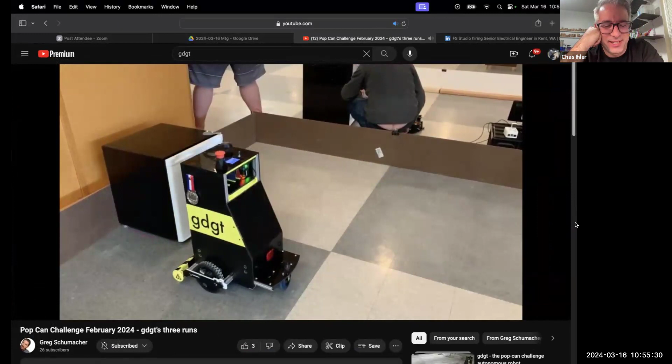What did you do your presentation information in for your robot? Did you just make PowerPoint slides or? Yeah, exactly. Is your phone case yellow on purpose? No, just by chance. He's got his second place award case from last year, like my son's phone case, right there on his robot. He doesn't use it anymore. Hey, that's on brand.

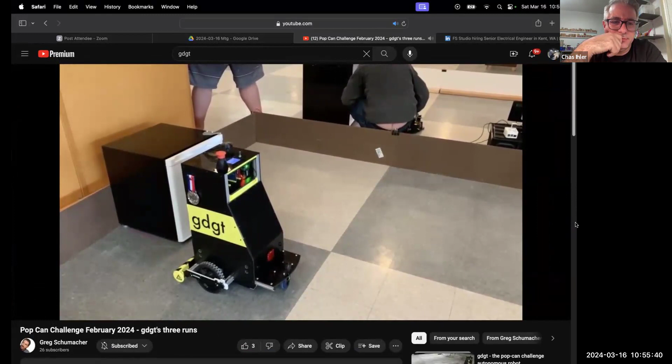It's got a little kind of edge on the side to grab that side. It's a little piece of acrylic. Who's this guy? You can kind of see he's turning on the light right now so that he can do his image detection with the light on and light off.

So it's kind of slipping slowly. I wonder if Greg's considered suction cups. And then you have to have some ability to release the suction or pull it in. Oh so yeah, you can't let go of air once you grab it, with a Venturi valve or something, you know.

It's really funny that you mentioned that, because the first thing I thought of was having a little shelf at the bottom of the claw that would keep the can from slipping down. And then I thought, well, wait a minute, when you go to set it down on the table, as the robot backs away, the can would be on the shelf, not on the table, and it would just pull the can back off.

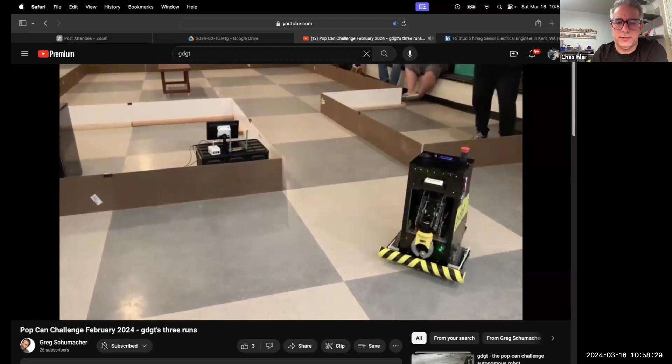Yeah, I don't think anybody's ever used a dolly as a frame. You only got 35 pounds, so you can't get too crazy with weight. That's the other cool thing about the waffle bot, I'm assuming it doesn't weigh very much. Oh yeah, well, I think that's mostly a 3D printed construction, if I remember right.

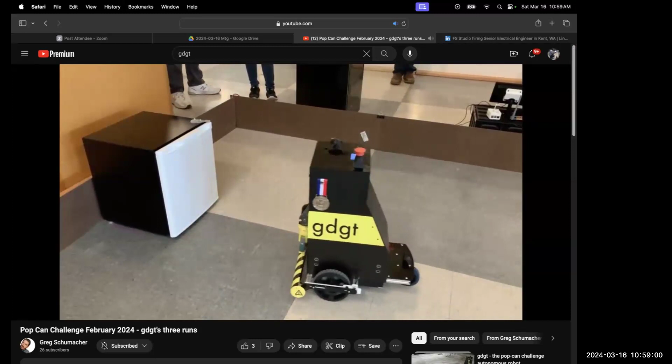He actually has to, how do I say this, like Gidget here uses her own weight and pulls back with the arm in order to open the door, right? But he has to actually wedge between the frame of the refrigerator and the door and sort of pry the two apart because he doesn't have weight. He'll slip if he tries to open the door any other way.

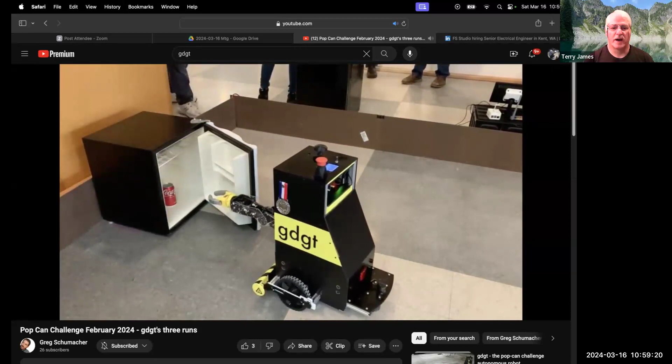Yeah, he's using the gap where the rubber seal is on the door to get a hold of it. And the last time I looked at his mechanism, it actually expands to pop the seal. Oh, does it? I didn't catch that.

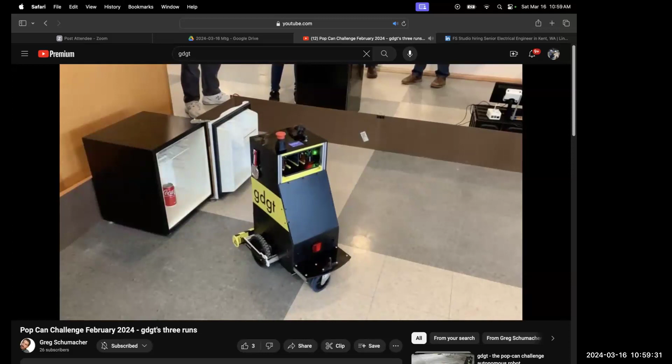Gripper open? Nope. Well, yeah. She's not in position. Not horizontal yet.

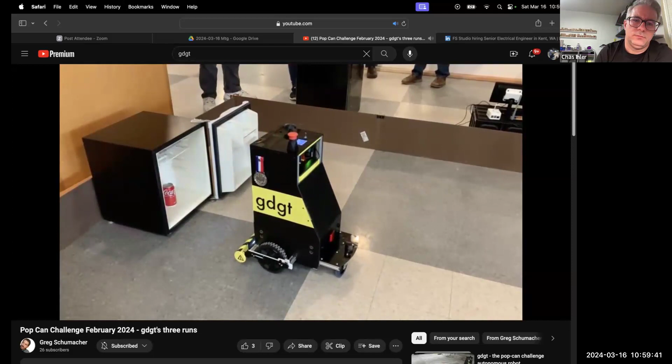Since different stages of the competition are timed, that's what you're hearing in the background — it's the timer telling the judge, Don, when an event has been completed, a time marker.

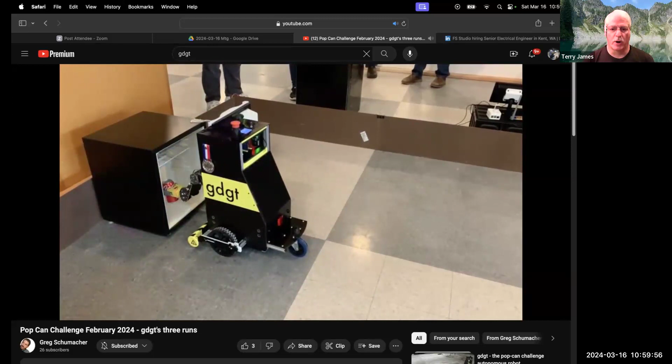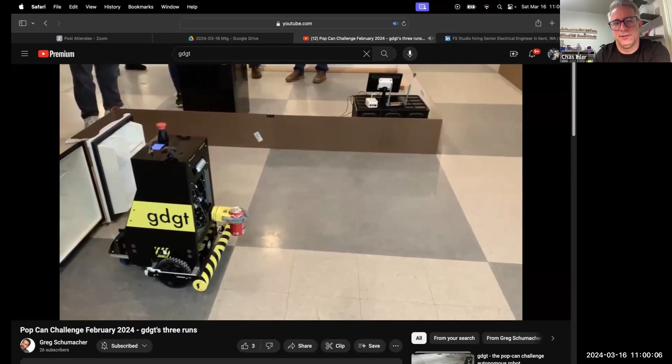Not yet. Not till it crosses the out-of-kitchen line — the transition from the white to the black square. There it goes. If you can push it out of the kitchen.

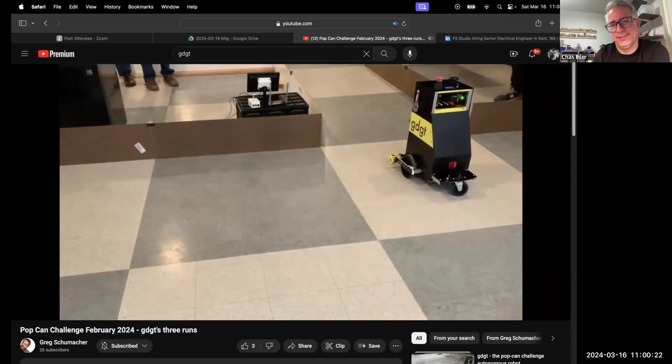Well, oh well, I'm not drinking that one. Look, now it's going that way.

This year I had to flip all those walls around because the robot's image recognition couldn't see the white walls, so I had to turn all the walls around. That took a while. We're actually talking about converting into 2-foot walls so the robots can use the walls a little bit better.

This is actually not the SRS's arena. Our arena has a slightly wider hallway because I was lazy and wanted everything to be very exchangeable, so it's all 4-foot chunks. It fits nice on the floor tiles though, so it looks like it's made for that area. The SRS's arena is 8-foot chunks, where this one fit well in the back of my vehicle.

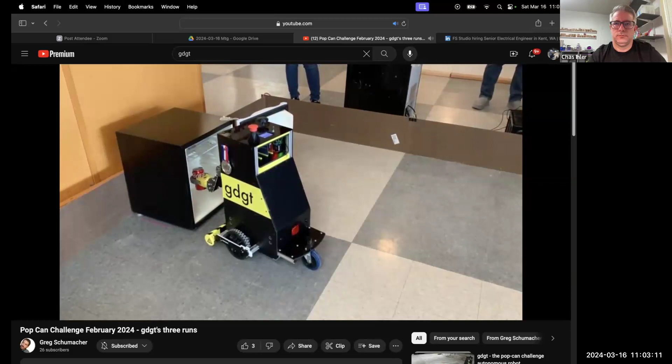Somebody to close the door, huh? Yeah, the lazy teenager robot.

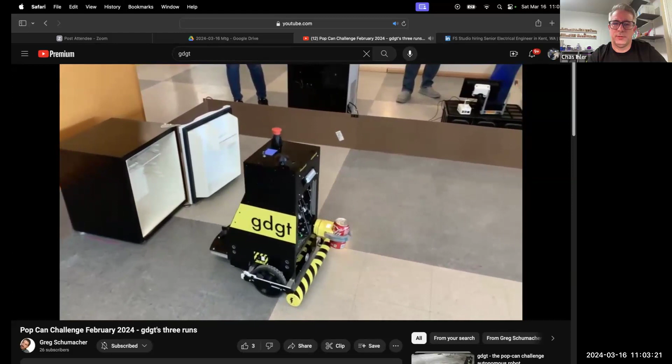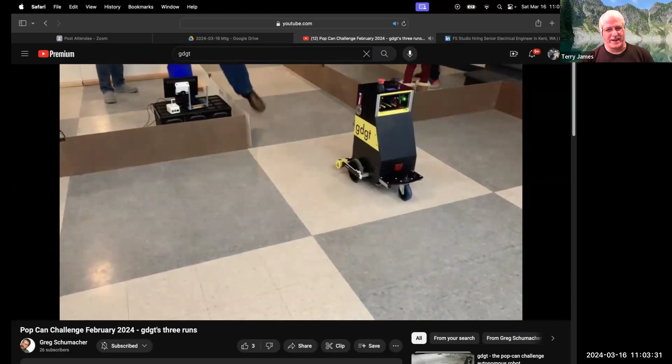You get docked. It's not discarding clothing though, as it goes. Not yet. You could have it ejecting socks or something. For sure.

How was that? All right. Bob, 2 minutes to go. I'm gonna drop my — actually I'd just bring up this other thing. Maybe. Nope. Okay.

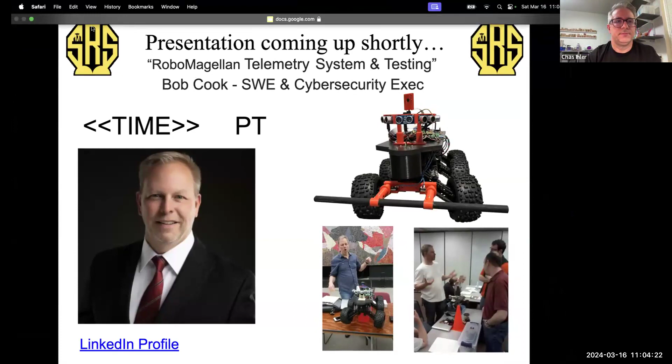I'll leave this up here for a whopping 1 minute, and I'll be right back. Okay, I'll start when you're back. Okay.

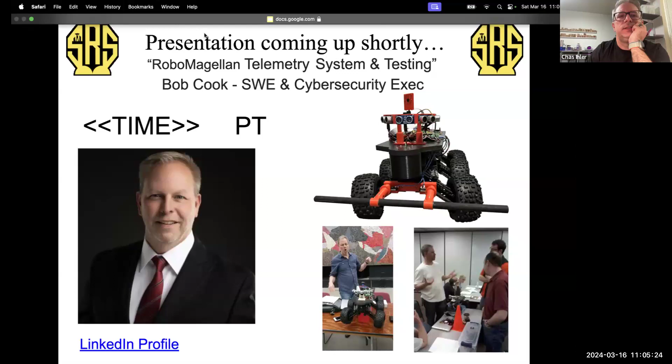Alrighty. Guess Bob, it's all you. Thank you, sir.

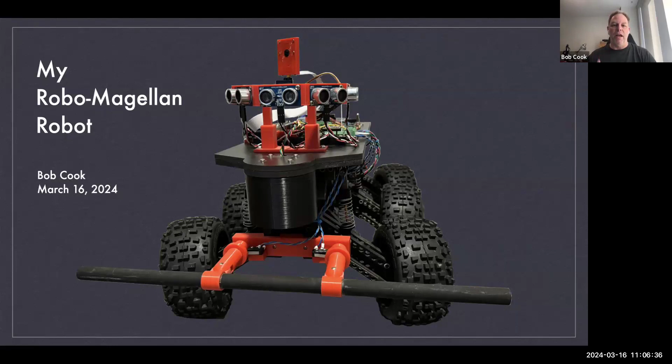This is probably the best summary I could come up with. I've participated in robot contests for a long time, and it's always about how do you get better. I think Chaz kind of captured it right — it's not about trying to win as much as it's trying to learn. It's a hobby after all. So these are some thoughts about how I avoid disappointment with my projects, particularly we'll talk mostly about Robomagellan and a little bit about some other stuff.

So some notes just to get started and set the scene. You might know me or have seen the presentation from December, and if not, don't worry, you're not going to miss anything — I'll cover a little bit of the background you'll need to know. I also have a mini sumo robot called the Thin Man that people might have seen at Robothons in the past. Please keep in mind this is my hobby, I do this for fun, I'm not a professional, so if your expectations are that you're going to see some super guru level presentation, I'll just make sure you set your expectations a little lower than that. This is by far not the only way to do a Robomagellan robot or any kind of robot — these are just things I have done and found successful. All the content is mine unless I've noted it otherwise.

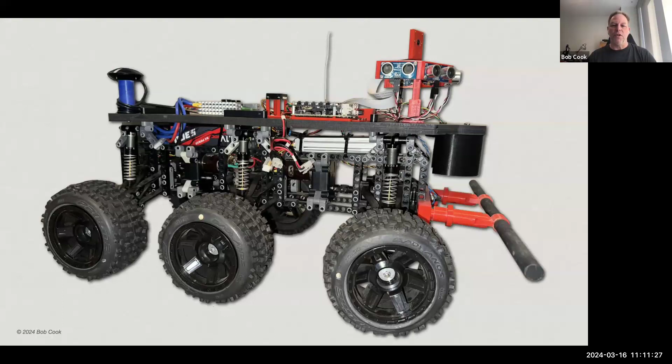So just for background, let's talk about my robot. This is a picture of the left side, a side view, meant to give a sense of what's going on mechanically. Mechanically, it's a MINDS-I kit. It looks like Lego, but it's not - it's larger scale than Lego, and it's designed to be quite robust.

MINDS-I produces a number of kits and educational programs. I have to thank Carol Hazlitt for this robot kit as a gift she gave me a number of years ago. It has 6 wheels, steering in the front and back, and is about the size of a 1/10 scale RC truck kit, maybe a little larger. I felt this size worked well for the outdoor parks - I had a smaller robot in the past that was getting stuck on curbs.

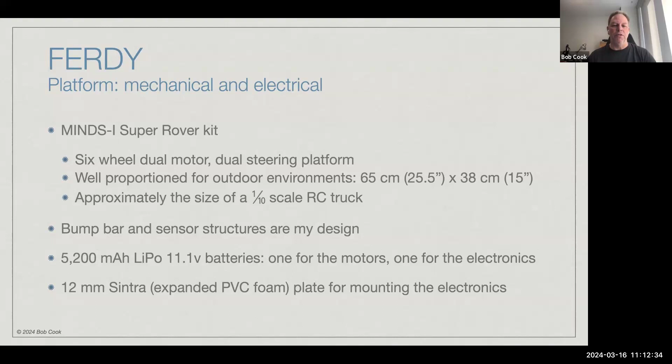This one's large enough, and the motors are beefy enough not to worry about that problem. It can also drive through brush, through all sorts of shrubs and such. A lot of the sensors and brackets you see are just 3D printed things I've made over the years, and it's all LiPo battery powered. The very top of it is black Sintra, an expanded foam.

The IMU and GPS I'm using connect over serial, so the Teensy has tons of serial ports to do that. And it talks to the Raspberry Pi, which is doing more higher level, I'll say thinking in air quotes because it's not really thinking in the general AI sense, but more like path planning. I've got a slide here to talk about what's really going on. There's a TFT display on that, and the Raspberry Pi camera.

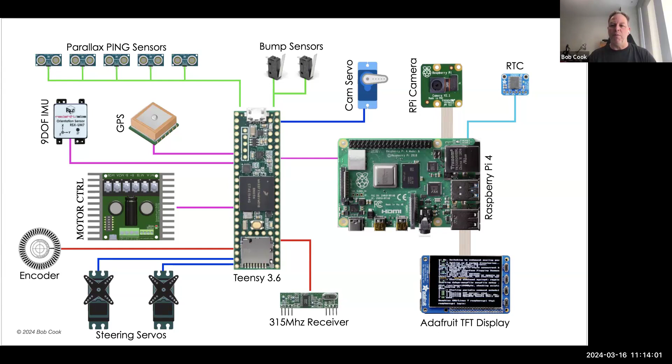So the world is kind of divided between what's happening on the Teensy and what's happening on the Raspberry Pi. The Teensy is doing all the sensors, all the steering, all the servo controls, and running the speed control with the motor controller. It's a Sabertooth interface for a dual motor interface. It works quite well. And there's also a radio.

The Robomagellan rules have a dead man switch, a stop switch that you have to have, much like what Chaz was talking about earlier. Mine happens to be on a 315 megahertz radio link. And probably, we're going to get to a lot of this, the very last line here is talking about sending telemetry and state information up to the Raspberry Pi. So the Raspberry Pi is in communication with the Teensy, and it's a bidirectional communications serial link.

The Pi is also doing all the route planning. It has higher level strategy, so to speak, of how to get to waypoints, what to do at particular points in the plan. In my case, I'm also using a Raspberry Pi camera, and I talked a lot back in December about the machine learning model I developed for cone detection. The Pi also has a TFT display, a little display, and some push buttons for a local user interface.

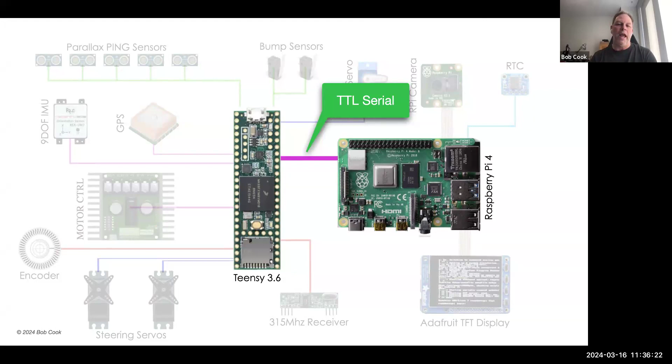So I use a PI loop for maintaining decent control over motor speed or vehicle speed, and other constants. I'll show a little bit more about what that is. But they're just things in your program that really don't change that often, but they are reference variables, so reference data. State is obviously something like, what's the IMU saying right now?

What's the current range of all the ping sensors? But also it's about the things that I've set. So what's the current position of the servo? What did I last set it to? What's the motor, the input on the encoder? What's the value of the output that I have set to? What are the current PI variables in terms of accumulated error and such? So that's all state information that's happening on the Teensy.

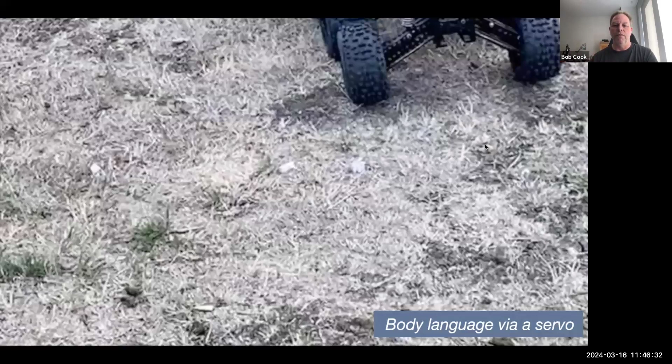It's actually something visible from a distance. I have servos for the camera, and I use that in this context. I wiggle it in a particular way for certain reasons, and it makes it easy to see what's going on. So here's a video of watching that. You're watching the little camera, the thing that's wiggling at the top there right now. And essentially, I use a particular action here.

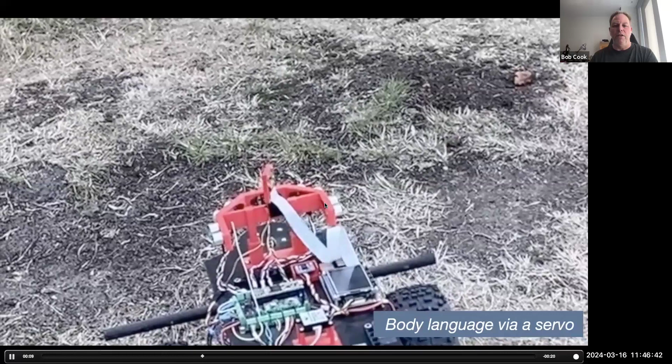From a distance, I can actually know that a few different things have happened. I know that the seek happened because I can visually see the camera moving. I know approximately what direction it should actually see the cone. And I can actually see that it got a positive detection because it does that little motion at the end, moving the camera back and then putting it back towards the cone that it found.

Here's another kind of view of the same kind of behavior, different point in time. So it's obviously going to do the sweep again. The camera's looking around for the cone, running all images through its ML model. And as I'm an observer watching the robot, I kind of know what's supposed to be happening, right? The program is to cycle through the different points in rotation looking for that.

And it's like, oh, wait a minute, it was looking in a direction. It rotated back to center. And now it rotated back looking at the cone and starting to move. I know for a fact that it's actually found a positive detection. So that's what I call body language, or my friend Marcus actually coined it. But I thought it was a really cool concept, and I think it's something that's probably underutilized by a lot of people. It's that kind of instant feedback from a distance that you know the robot has hit a certain point in the program - a certain point of success or a certain point of failure.